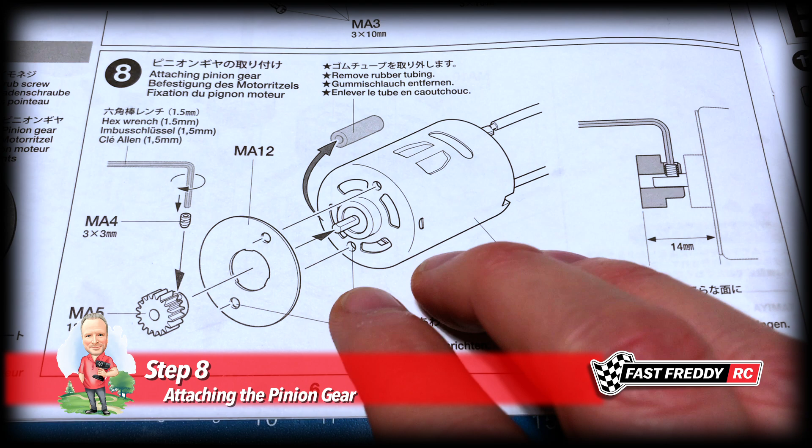So for step 8, attaching the pinion gear, you can see that we're going to need to grab our motor, put the motor plate on, and then put our pinion gear on with the grub screw. You can see here that it has to be 14 millimeters from the motor plate to the outside, so we're going to need to figure that one out.

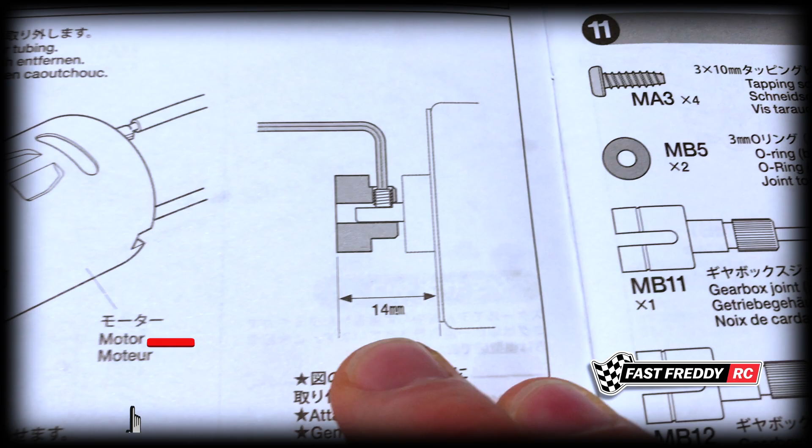So I've pulled together what we need. There's our plate, the pinion, and the grub. So I'll set this up and let's attach this all to the motor.

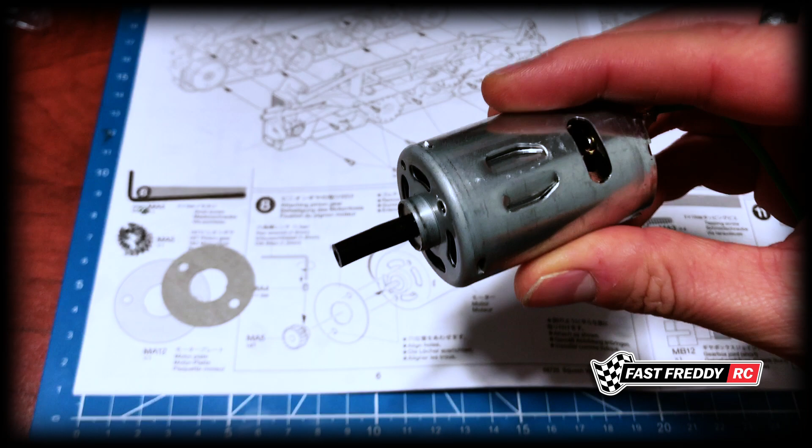First off, if we grab our motor, we're going to have to grab this and take it off. The easiest way to do that, I find, is just grab a pair of pliers, grab the tip, press hard, and pull. There we go, there's the rubber off of the motor.

Now the other thing is, I always tend to do this - you can see in terms of how they're showing you putting this all on, the divots or whatever they call them with the open holes on this side. There's only the one on this side. So I tend to follow the manual when it comes to this sort of thing, and I will keep those on facing up.

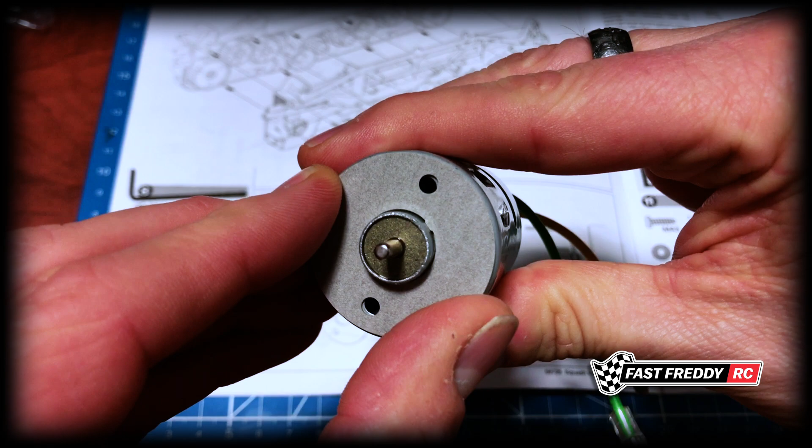So first things first, we're going to grab our motor plate, push that into place. There we go, just make sure that it is in line with the holes, which it is.

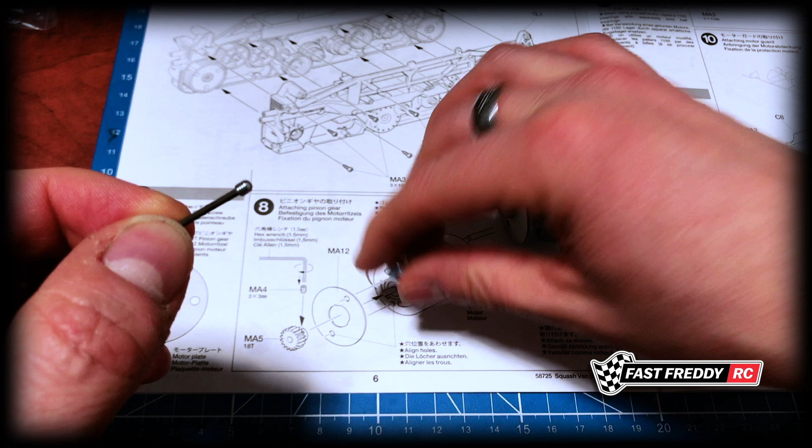And then we've got our grub screw that we're going to need to put into the pinion gear. Now, what I find, and I've said this before in other builds, I like to put the grub screw on the end of the Allen key and then start the process of screwing this in. You can see just like that, it's in - only because then I'm not having to worry about actually getting into the hole at the same time.

And now we can screw this on. Now, here is another thing that I like to do - you see how that's got to sit on the flat, and you want to make sure that it is doing that. As a temporary measure, I will get it screwed down enough that it's loose, but you can see that it's also turning the motor, because the grub screws down enough that it can't turn without turning the motor.

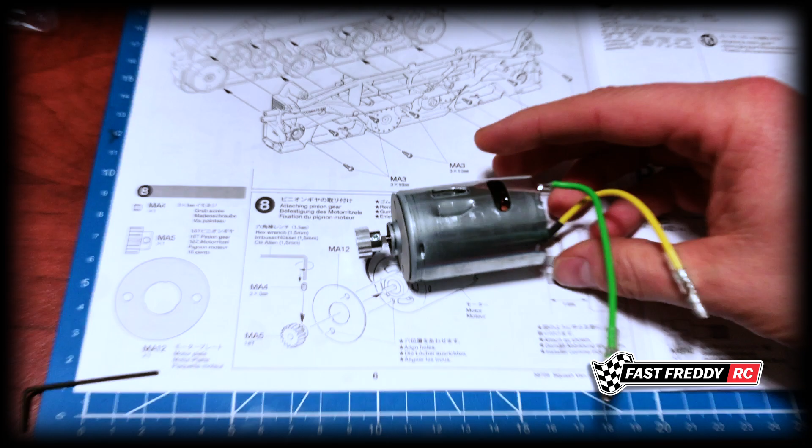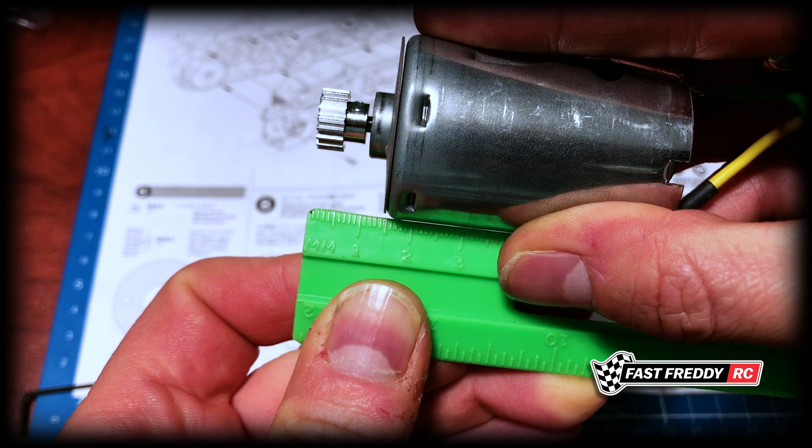So now that that is in place and ready to go, we're left with doing the measurements. So what we're going to do is we've got to make it 14 millimeters. I'm going to take it to the 14 millimeters, roughly. And then we're going to screw this in place.

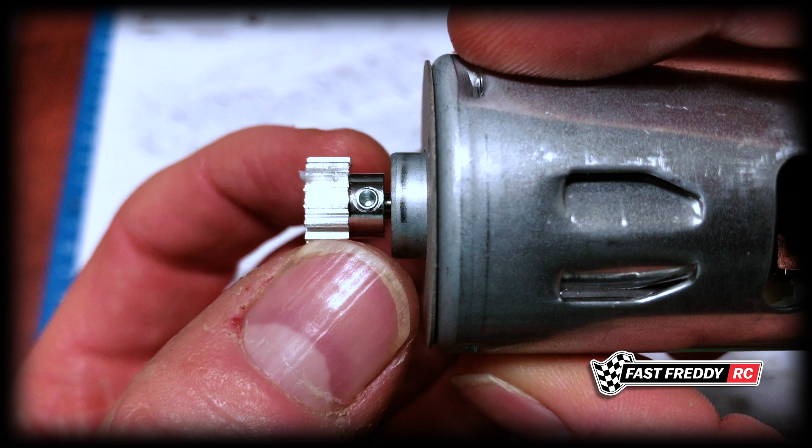Now, I can already tell it's going to slide around, so I'm just going to twist this on just a little bit more than what I did before. With the camera, I'm finding that a little harder to put on, but if you look at this, there's your 14. If we take it from the motor mount, it's where it needs to be - it is exactly 14 millimeters.

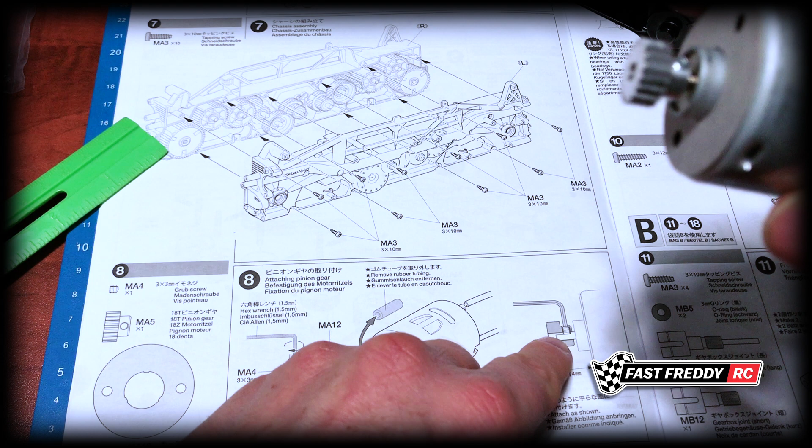Now, what I did find is if you take a look at this, it was almost easier to put it on this way. If you look at where the grub screw is, it's literally the pinion itself sitting just a little further back from the flat spot, leaving a very thin gap between the pinion and the motor mount.

So I tightened it up a little bit. It's not all the way down, but when you put it back on, it literally is sitting at the 14 millimeters. So it's just going to be a matter of tightening this down.

Now, I've said this before - this is the one place where when you're tightening on the pinion, tighten the pinion. I like to do it as tight as I possibly can to make sure that it doesn't go anywhere. I don't like using Loctite - I would just rather put enough pressure on this that it's going to hold it in place.

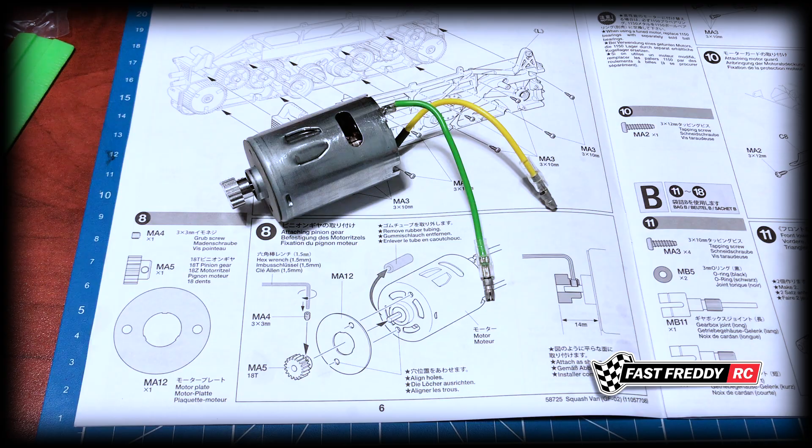So there we go, there is our motor with the pinion in place. So that is step 8, it's literally just that. So we can now move on to step 9, and we're going to attach the motor - and of course, it looks like we've got a couple of other pieces to put in as well.